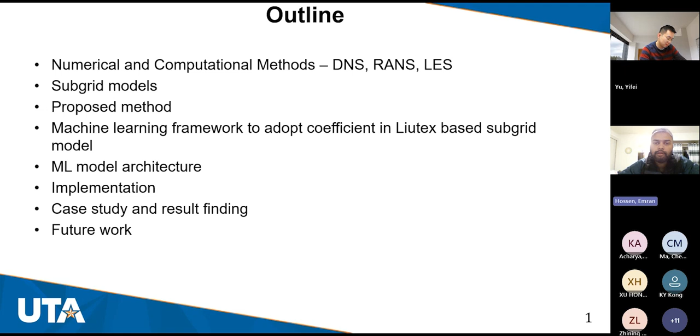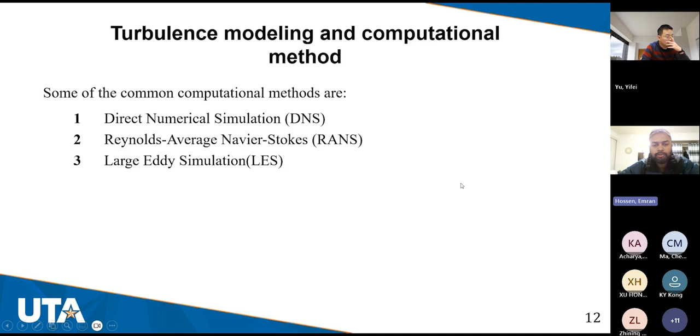Our turbulence modeling and computational methods are direct numerical simulation (DNS), Reynolds averaged Navier-Stokes (RANS), and large eddy simulation (LES). DNS solves all scales of turbulent motion directly without a turbulence model. The Navier-Stokes equations are discretized in time and space to solve numerically. DNS resolves the largest to smallest scales of turbulent motion, however the computational cost is very expensive.

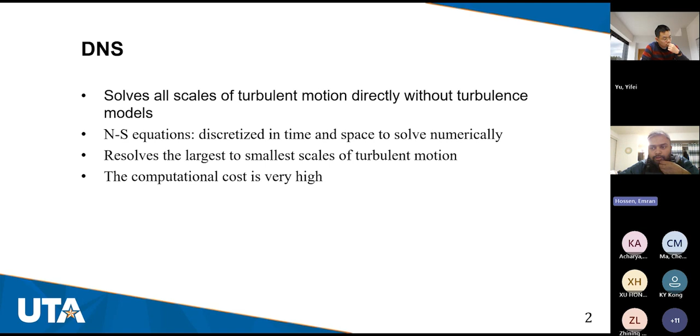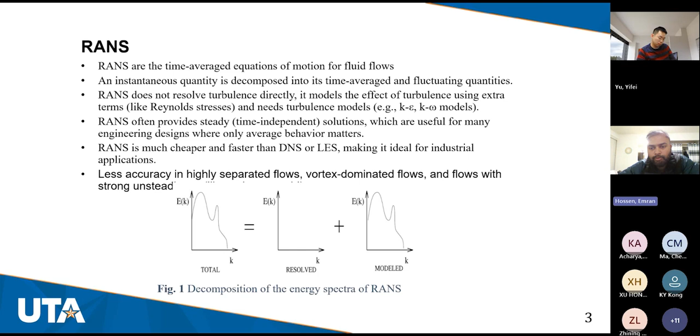RANS are the time-averaged equations of motion for fluid flows. An instantaneous quantity is decomposed into its time average and fluctuating quantities. RANS does not resolve turbulence directly; it models the effect of turbulence using extra terms like Reynolds stresses, with turbulence models such as K-epsilon and K-omega models. RANS is much cheaper and faster than DNS or LES, making it ideal for industrial applications, but it is less accurate in highly separated flows, vortex dominated flows, and flows with strong unsteadiness.

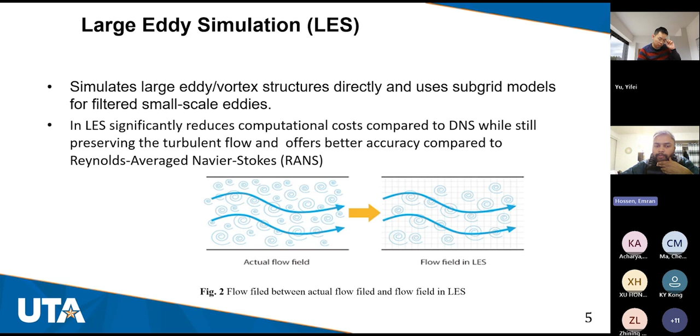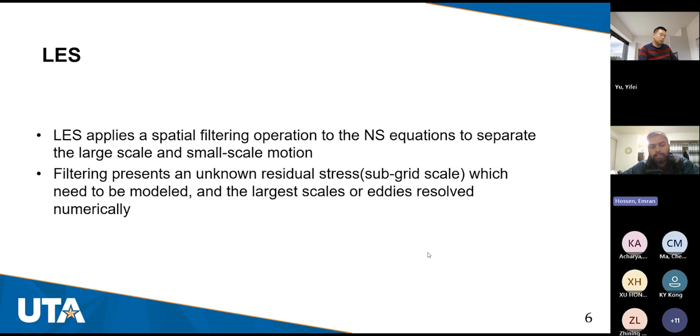Large eddy simulation (LES) simulates large eddies or vortex structures directly and uses subgrid models for filtered small scale eddies. LES significantly reduces computational cost compared to DNS while still preserving the turbulent flow, and offers better accuracy compared to Reynolds averaged Navier-Stokes equations. LES applies a spatial filtering operation to the Navier-Stokes equations to separate large scale and small scale motion. This filtering presents an unknown residual stress, the subgrid scale stress, which needs to be modeled, while the largest scales or eddies are resolved numerically.

Next, our talk is about the subgrid scale model. This subgrid model is defined by the formula: tau_ij minus 1/3 tau_ii delta_ij equals -2 nu_t S_ij bar, where 1/3 tau_ii delta_ij is the isotropic part of the subgrid stress tensor, delta_ij is the Kronecker delta function, and S_ij bar is the strain rate tensor.

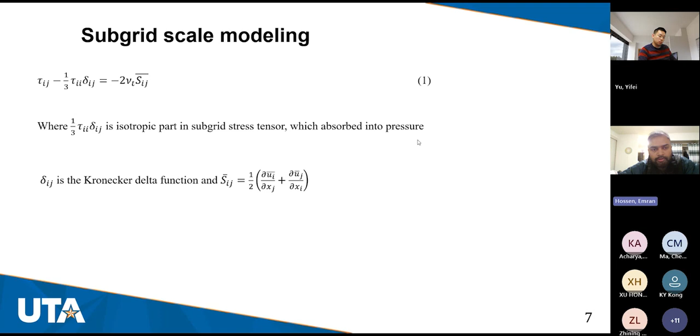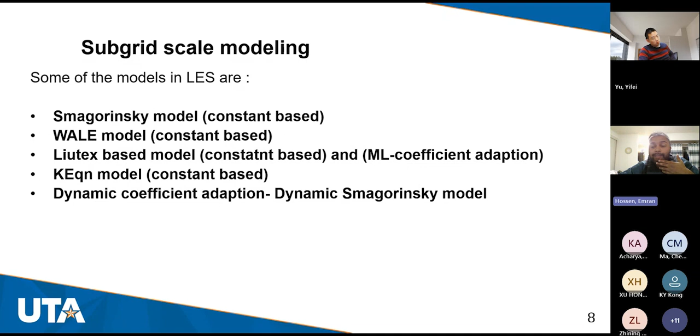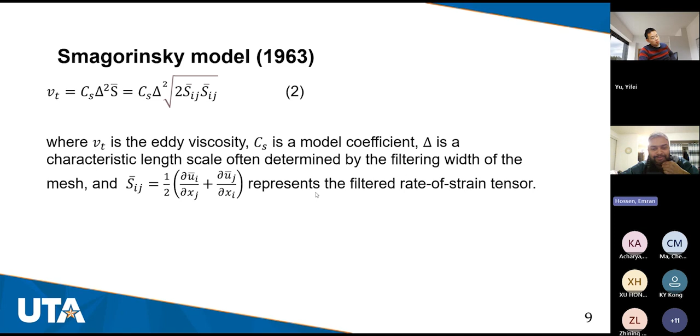Here is the formula for the Smagorinsky model—I've seen a lot of speakers already talk about these models. The Smagorinsky model uses a constant coefficient, and there are a lot of drawbacks in the Smagorinsky model, which overestimates eddy viscosity under strong background shear, leading to non-zero residual viscosity and shear stress near the wall.

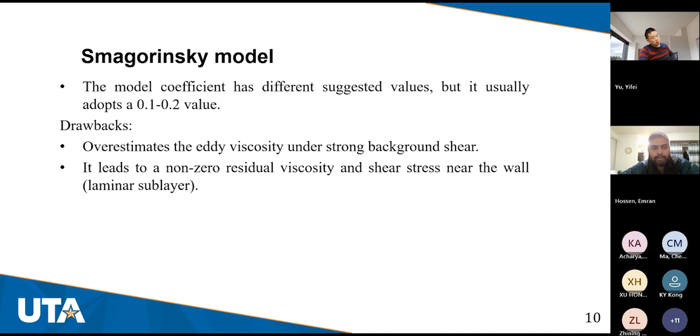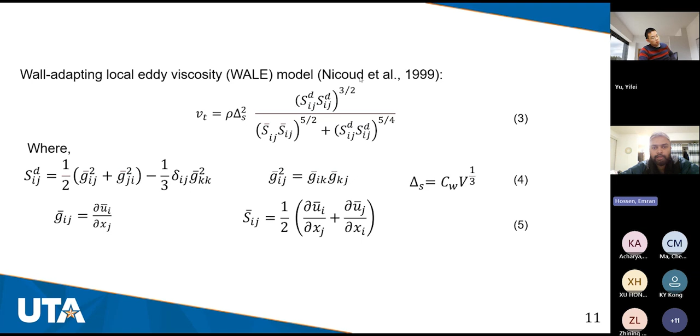The wall-adapting local eddy viscosity (WALE) model improved on the Smagorinsky model, but it still applies a constant based coefficient—you can see the coefficient CW is 0.325. The WALE model improves the prediction of subgrid scale turbulence, particularly in wall-bounded flows, though resolving the near-wall region can be computationally expensive.

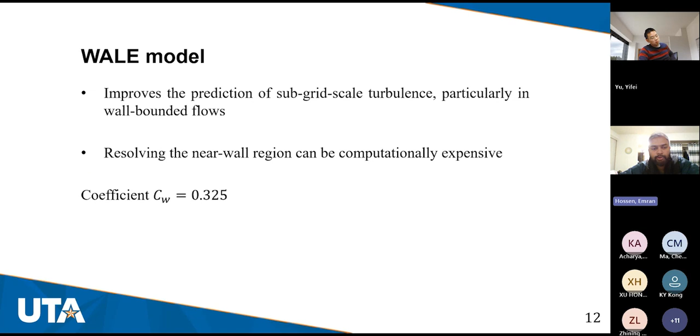The dynamic Smagorinsky model is not a constant based coefficient model; it is spatially varying and uses a test filter 2 delta. The coefficient is defined by C equals LM over MM, where Lij is the Germano identity tensor and Mij is the model tensor.

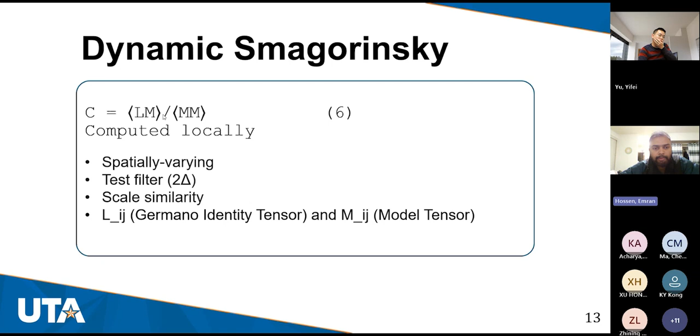So before going to our Liutex based subgrid model, I'm just going over the Liutex.

Liutex is a third generation vortex identification method defined as R equal to R r, where small r bar is the eigenvector of the velocity gradient tensor, and we have vorticity omega dot r greater than 0. As for strength, an explicit formula is found by Wang in 2019. He defined r equal omega dot r minus the square root of omega dot r squared minus 4 lambda ci squared, where omega is vorticity, r is Liutex direction, and lambda ci is the imaginary part of eigenvalue of velocity gradient tensor.

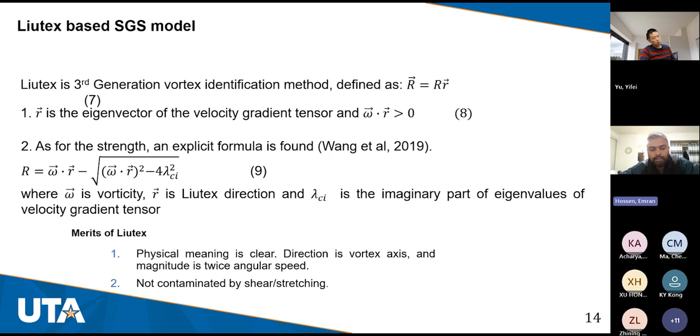The merit of Liutex is that its physical meaning is clear. Direction is the vortex axis, and magnitude is twice the angular speed. Liutex is not contaminated by shear or stretching.

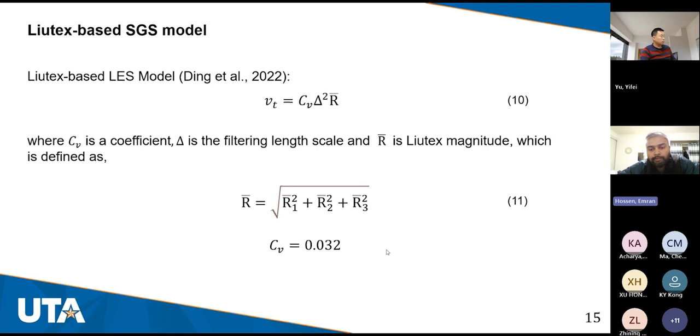Our proposed machine learning model is based on machine learning based coefficient adaptation: nu t equal C nu ml delta squared r, where C nu ml is a function of local flow features. That function of local flow features we find from the neural network or machine learning model. The local flow features are extracted from the DNS data, and this way we can find the machine learning coefficient adaptation, C nu ml equal...

For this work, I used a PINN model. PINN is a physics informed neural network, and we've extracted features from the DNS data. The data are R1, R2, R3, R bar, S bar, omega. These features we've extracted from the DNS data, and according to this DNS data, the machine learning or PINN model predicted the C nu coefficient.

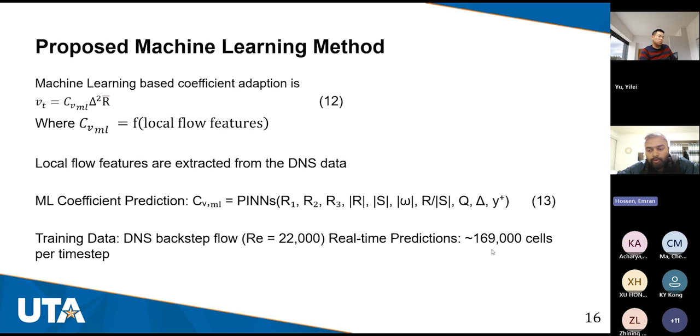We use the training data as DNS backstep flow, where Reynolds number is 22,000, and for real time prediction we give 169,000 cells per time step.

So a little fundamental of basic neural networks. According to our work, we have a neural network that mimics how our brain processes information. In neural network architecture, we have first input layers, then hidden layers, and then we find the output layers.

For our case, in inputs we have flow features, extracted from the DNS data. In the processing, hidden layers process the data and learn the patterns. Then in output layers, we find whatever we need, according to our model or our desired work.

For our case, we are getting the C nu, the model coefficient. For our PINN architecture, we use input layers, and we started with just a few hidden layers. The first hidden layer has 64 neurons, the second hidden layer has 64 neurons, and the third hidden layer has 32 neurons. In the output layer, we have C nu ml.

So that is the methodology we have in our machine learning CFD integration. From that physics informed neural network architecture, we extracted the features, and then did PINN inference. For the PINN inference, we first used the PINN model in Python, and there we used ONNX runtime. ONNX runtime is like a machine learning inference tool, where we can change the programming language to a different solver.

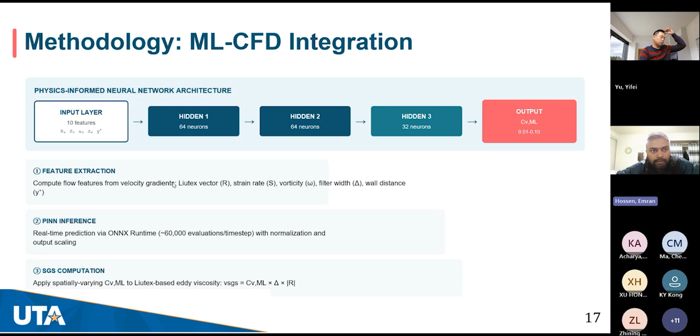The implementation and success, since it is a very primary process of the machine learning based model to the Liutex based subgrid model: first we try to implement if the machine learning model works, and if we find a different C nu or different coefficient instead of the constant based C nu. So we are able to make an infrastructure of ONNX runtime, which is compiled in OpenFOAM as well.

And then we have a custom Liutex ML model, also compiled in OpenFOAM version 2312, with parallel execution also applied. So these are all the runtime performance results we have.

Real-time inference we have is 60K per time step, and spatially varying C nu ml field that we find from the DNS data, and dynamic coefficient updates. So according to our time step and our case, we can get dynamic coefficients, and this feature extraction we have from the DNS.

So for validation of our model, I chose the backward step flow, going through the backward step flow and also the recent study of the Park backward step case. Backstep flow involves a sudden geometric change where the flow encounters this change, a pressure gradient also exists, and it creates primary and secondary vortices. This is the general case for the backstep geometry.

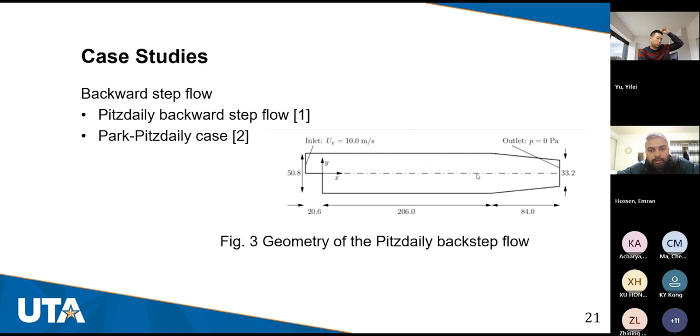In our recent study of the Park backstep case, we used a very similar case study geometry but a different domain. We have step height h equal to 0.0254 meters, expansion ratio of 2 to 1, and span of 0.173 meters. Reynolds number is 22,000, and total cells for the coarse grid is 169K. Mesh type is structured hexahedral mesh, with refinement near the step and wall.

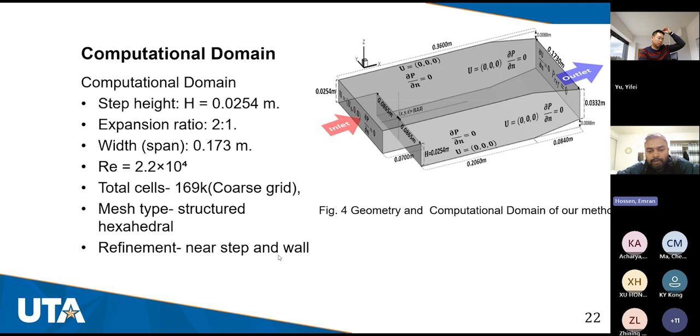In the result section, we figured out that our machine learning based Liutex subgrid model gives an exact backstep flow structure. Here we have seen two vortices generated: the primary vortex and secondary vortex.

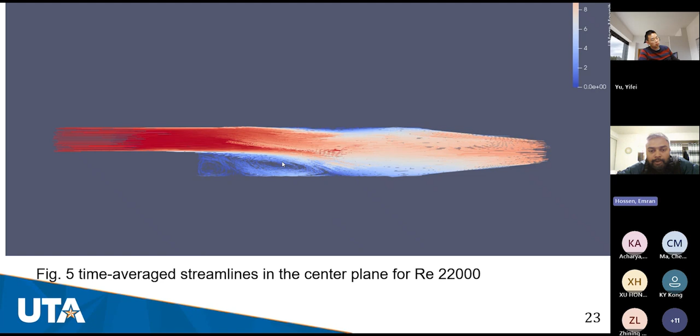We also found the time-averaged velocity profile in the center plane for Reynolds number 22,000, and we compared this with the DNS results, the Liutex based model, and the Liutex ML current study.

For the Liutex ML based model, we couldn't go over a good time step because we ran this on our local computer, but still using parallel computing. We couldn't go over a large time step like we could on an HPC system.

Still, you can see that the Liutex ML method is very close to the Liutex constant-based model. In some parts, near the wall, the Liutex ML based model actually gives better results than the Liutex constant-based model, and is very close to the DNS.

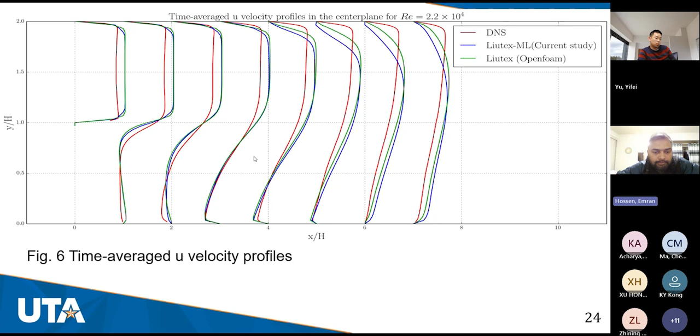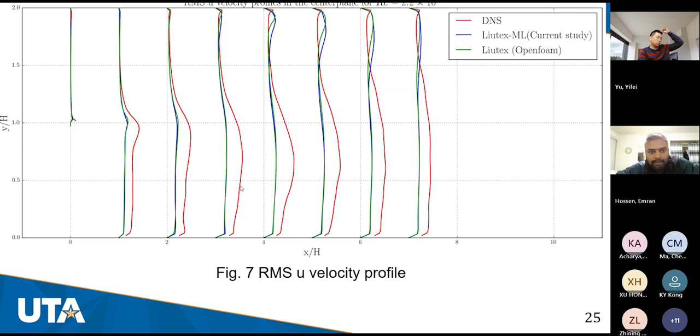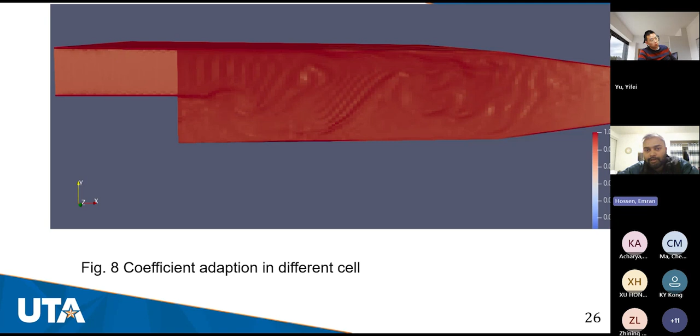For conclusion and impact: first of all, we completed PINNs and ONNX in OpenFOAM. We compiled PINNs and ONNX and these models into OpenFOAM. The technical achievement is real-time machine learning inference integrated into the OpenFOAM CFD solver, with especially varying coefficients from flow physics.

Research insight: DNS and LES scale separation is critical. Geometry matching in training data matters. Machine learning models are resolution specific. There's subgrid scale coefficient adaptation by machine learning. We have infrastructure ready, which includes OpenFOAM integration, ONNX runtime integration, and parallel execution as well.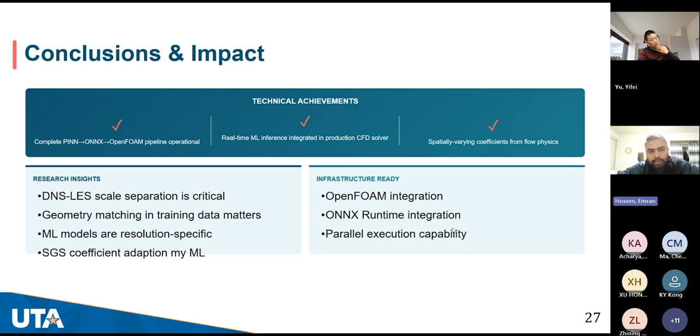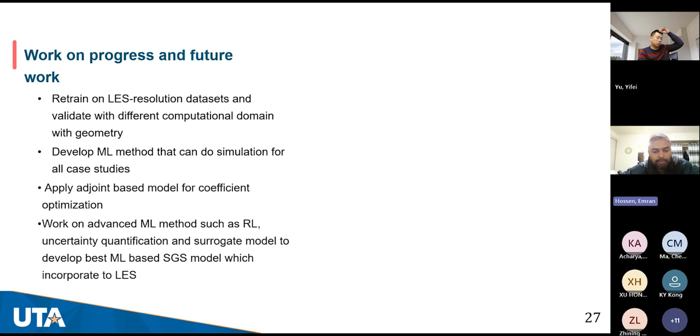For work in progress and future work, we will retrain on LES resolution datasets and validate with different computational domains and geometry. We'll develop a machine learning method that can do simulation for all case studies. We'll apply adjoint based models for coefficient optimization. We'll work on advanced machine learning methods such as reinforcement learning, uncertainty quantification, and surrogate models to develop the best machine learning based subgrid scale model, which incorporates into large eddy simulation.